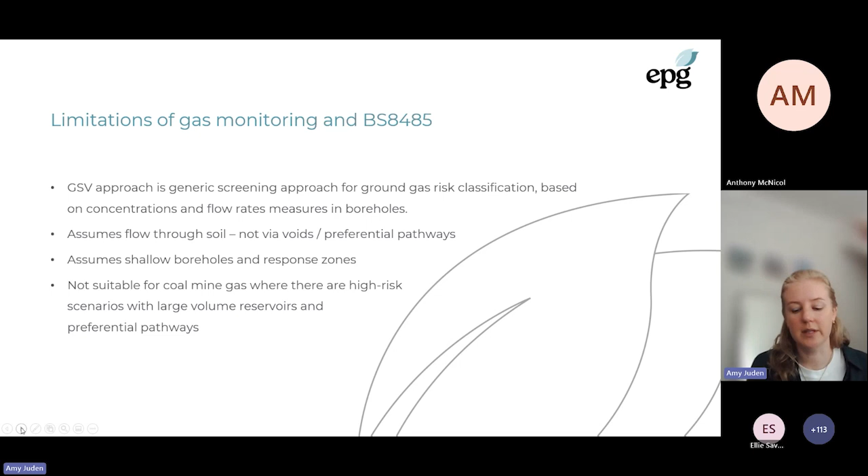So if you need to do this kind of assessment, when and how should you do that? You don't need to do it all of the time. You can do a simple preliminary screening assessment and show that a site is negligible or very low risk.

And if that's a confident assessment, either purely based on the desk-based information or backed up by site investigation, that's a perfect and fine place to start to end even. But if that preliminary assessment is highlighting some moderate or high risk factors, then you might need to consider other things.

But if we're saying when you don't need to do gas flux calculations, so your preliminary assessment is moderate or high risk, but then you've got site investigation data that shows, okay, maybe I might have some moderate or high risk factors. However, groundwater levels are fully saturating the workings and they're there all of the time, and I'm confident in that, and we've got a consistent covering of glacial till.

Or yes, there's a mine shaft nearby, but look, I've had a look at it and I'm confident it's fully grouted, or it will be grouted, or it is vented and maintained. Then, although you've got the high risk factors, you've got sufficient lines of evidence there and confidence to allow you to move back up the risk assessment model and confirm a low risk.

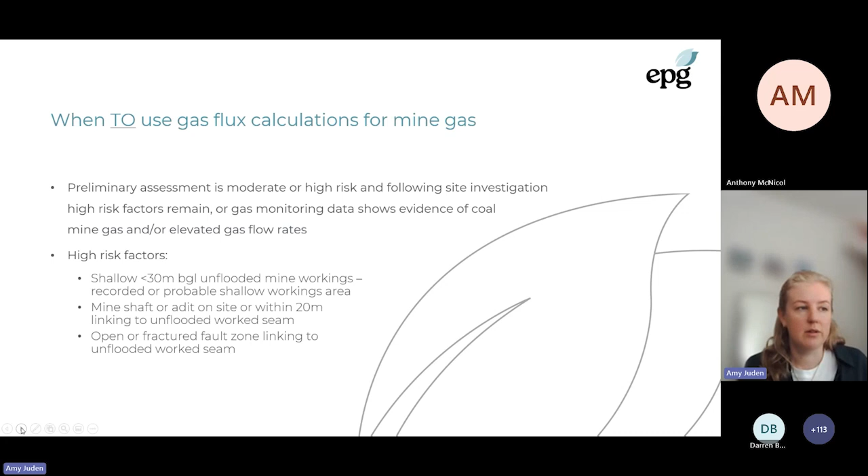So how would we do that? There are different simple one-dimensional steady-state equations that we can use for gas flux, modifying some of the assumptions in the models to make them specific to your site in terms of the migration distance, and the type of soil that the gas has to travel through, or the permeability of the pathway. It's possible to do a kind of calc and a model.

Keep in mind, these are very simplistic, like I said, one-dimensional steady-state equations. Those conditions don't exist in nature. So these models are inherently wrong. So why would we do them then?

They're useful. You can make some conservative assumptions, and you can show, look, even if this unlikely scenario is happening, my design is robust enough to deal with it, and it gives you a level of confidence that your assessment is suitably precautionary.

Definitely need to be done carefully, maybe with a sensitivity analysis on different input parameters, so you capture all of the uncertainty that you've got. And also maybe modelling multiple different scenarios.

Is it gas accumulating in the subsurface very close to the inside of the property and being pulled in by the stack effect of the building through the floor slab? Is that the key pathway that's going to drive the risk?

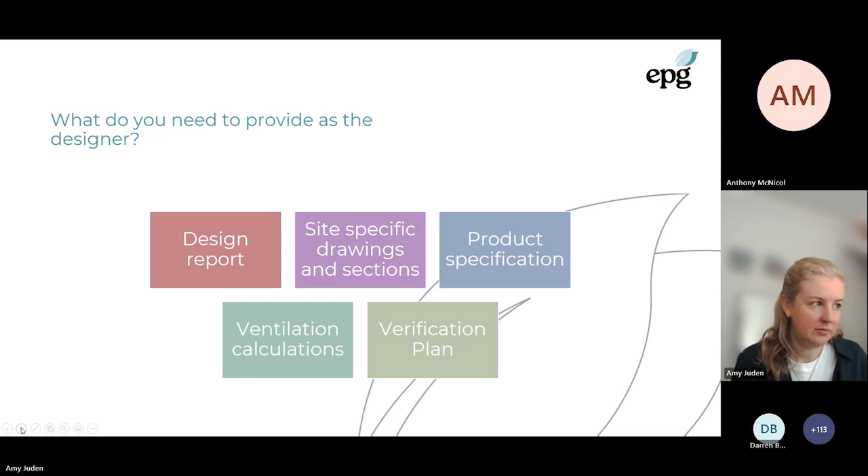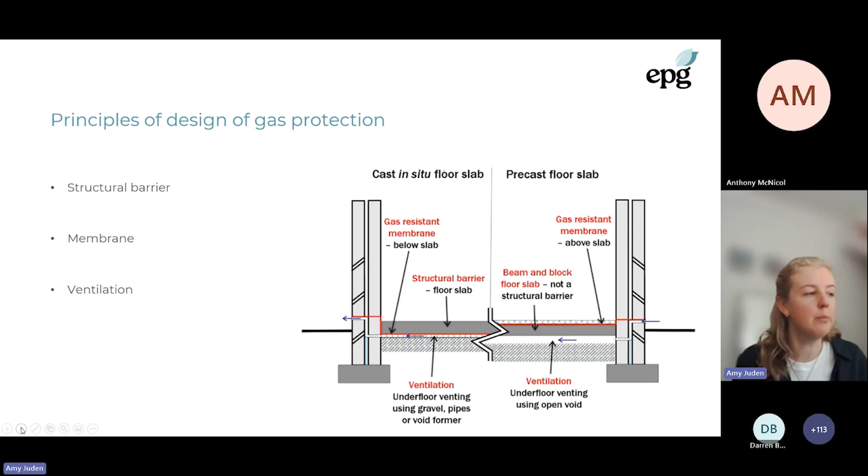Gas protection design is made up of generally three things: a structural barrier, some kind of membrane, and ventilation, a combination of those things, normally two of them, sometimes in high risk scenarios, all three.

And for coal mine gas protection design, the two most common solutions for most sites are a combination of some kind of subslab venting and a membrane over a suspended floor, or a raft foundation that offers really good inherent protection itself and a membrane. Generally with rafts, we put the membrane underneath the raft so it's out of harm's way and not going to get damaged by follow-on trades, but that's a kind of designer-specific assessment.

And seal the utilities ducts, very important. We know this is important because we've measured carbon dioxide coming from mine workings inside people's properties that were built on a raft foundation. And the way it was coming up was through the utilities duct around the water pipe. It's the first place we look when we've got gas inside a home.

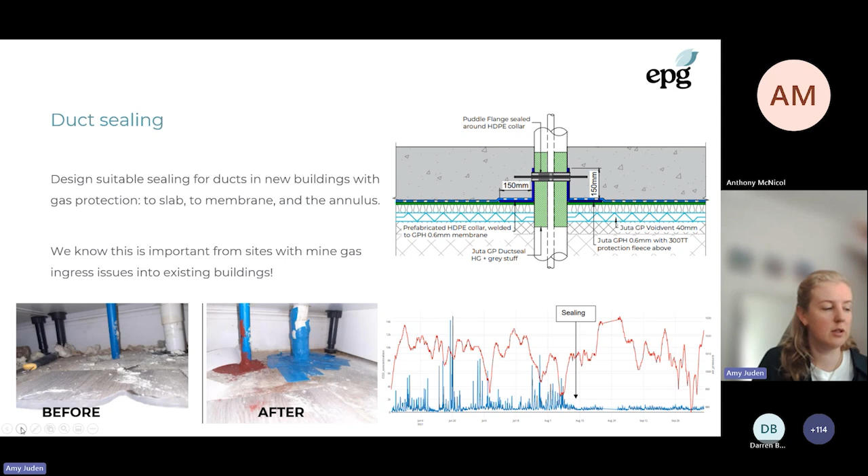And often sealing that up is the way to solve the problem, especially if you've got a raft foundation, which has really good attenuation on its own. So that's a little example - the graph shows it there where we're monitoring carbon dioxide inside a property getting up to quite high levels, and then after sealing the utilities duct, it's gone. So it's really important that's included in designs.

I've mentioned drill and grouting already. It's just some things to consider when we're reviewing drill and grout specs or inputting to them.

One key thing, I've heard mention of sacrificial plastic casings being used for grout holes. I've not measured on top of one and justified this and proven it, but in my head that could create a vertical conduit, increasing the permeability of the shallow ground and allowing gases to migrate. So I would always want to see a drill and grout spec confirm that casings were going to be removed from grout holes and that they would be grouted all the way up to the surface.

We've done a few detailed assessments of the risk of drilling and grouting actually pushing gas onto adjacent properties, and in some situations recommended that the grouting is done at the site boundary and working into the site rather than working across the site and pushing the gas out. And that is often kind of all that's really needed to deal with that potential risk.

So in conclusion, the approach to risk assessment and design is based on the risk profile. If you're negligible or low risk, then you're fine to do a screening assessment. Maybe you'll gather some gas monitoring data just to make that assessment more robust, but it needs to be conceptually low in order for that to be applicable, and obviously all the monitoring results need to be sufficiently low as well.

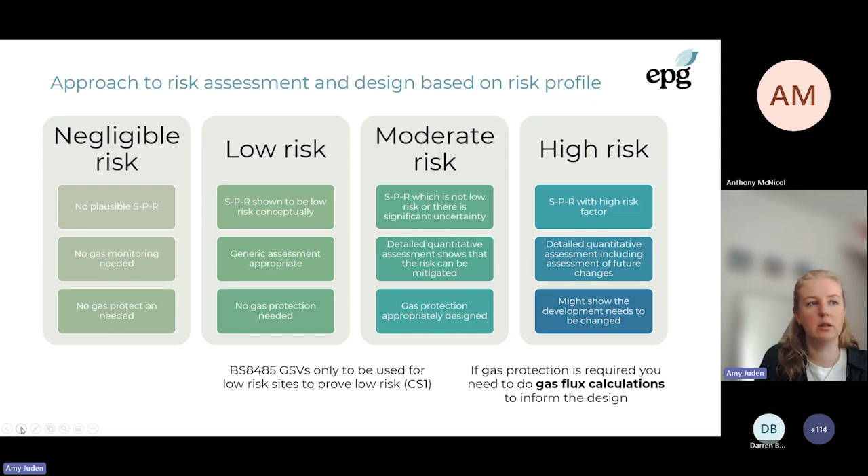If you're getting to moderate to high risk, can you use your site investigation to show that actually the risk is low, if workings are completely flooded or the shaft's appropriately treated, for instance? Or do you need to do some gas flux calculations to inform the design if those high risk factors are still present? And they need to be modelled in a different way than a generic screening approach from borehole data.

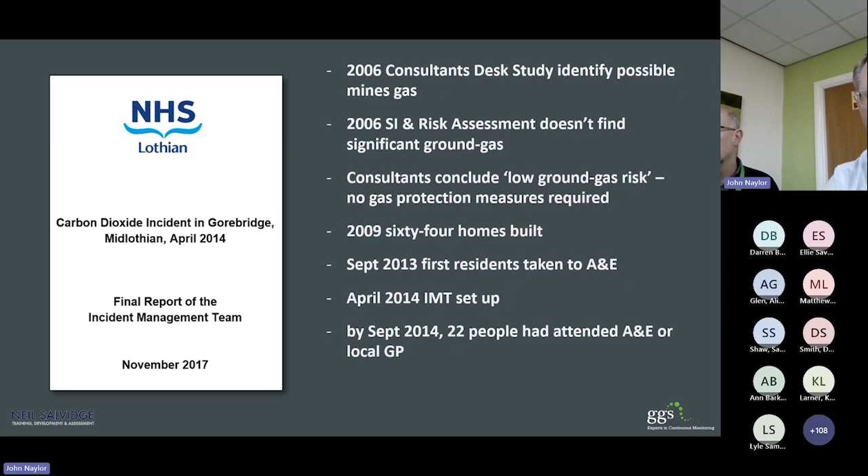2009 comes, 64 homes built. 2013, we had our first residents taken to A&E. So there's a good 4 or 5 year period there between the houses being built, occupation, before we actually had any reported incidents going on. And it was not until April that the IMT was set up, once it was established there was something a bit more going on here. By September 2014, 22 people had attended A&E or the local GP to seek advice or help.

And through further monitoring, elevated CO2, or carbon dioxide, had been confirmed within some of those properties. The decision, rightly or wrongly, was made by Midlothian Council by March 2016 that all those houses were demolished. That was the solution at the time. And of course, don't forget, it's not just the housing that's being demolished, we're displacing families. So, a very critical case study to bring up today.

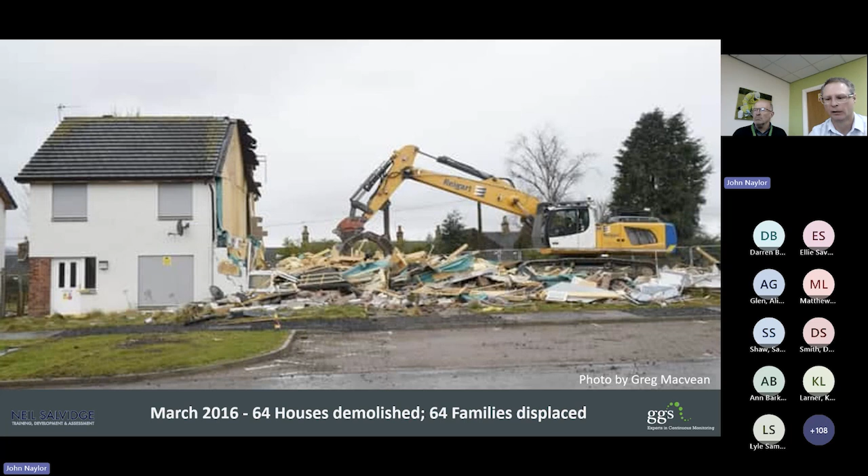So let's run through a little bit of commentary that we've picked up in the IMT. Not all the SI records were actually identified and found. Okay, we've already gone through what the desk study found and what the SI boreholes found. But was there a high risk potential for mines gas? Bear in mind what was said earlier.

The gas monitoring unfortunately hadn't been carried out in opportune periods. Had it been, it probably would have seen a different story. And unfortunately that hasn't been best practice since the 1990s. So again, unfortunately, they're here. CS1 was classified by the consultants, and we've already heard about, that actually using GSVs is the right thing to do on some of these sites, and therefore concluded nothing special required.

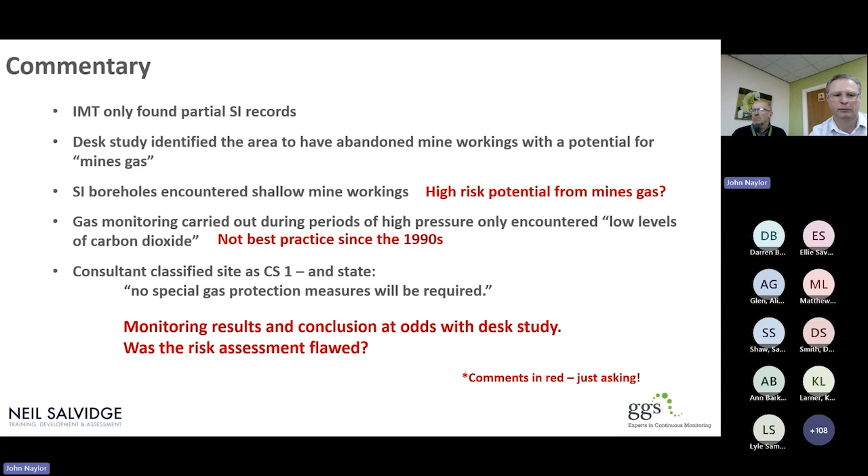For me, the monitoring results that we've found and the conclusions are completely at odds with what we found in our risk assessment. So a bit of a red flag for me there.

Let's look at some of the aerial photography just to see how it developed. So it's back in 1945, just some fields. And we moved to 2003.

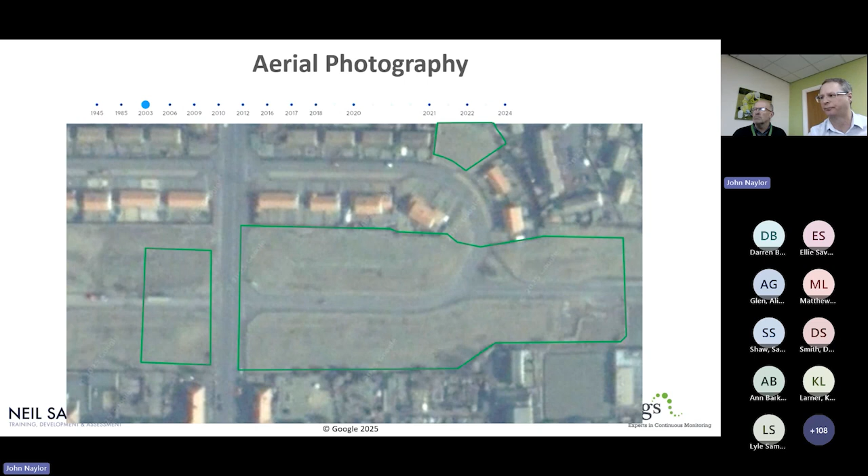Now, what's interesting here is that the strip where the housing was built was all grassed, open space. Don't know why, but that's how it was.

Then 2009, here you can see all the new houses nicely built and occupied. 2012, it's still there. And then by 2016, the evidence is in Google Maps of all that demolition. It's quite a sizable area that they've actually taken out.

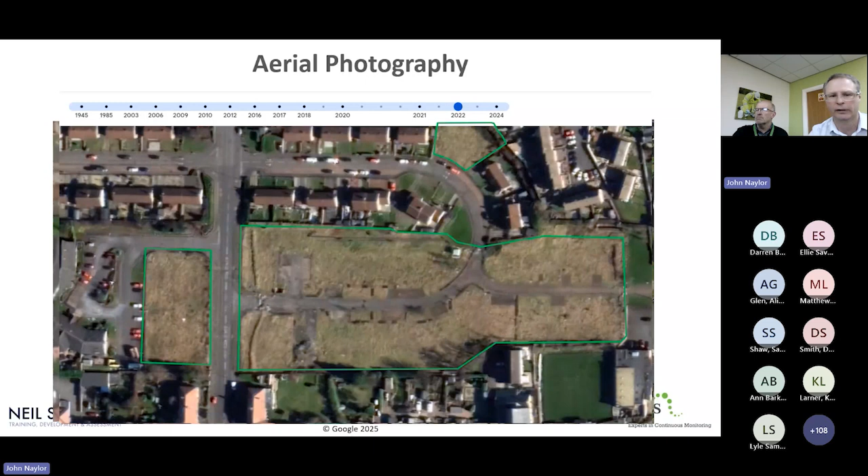That remained the case until relatively recently. It's only since last year that they've now started to redevelop Gorebridge or New Byres Crescent.

So let's take a little look at what might have gone wrong in there. Already mentioned earlier is about grouting, and it's really important. I can't stress how important this needs to be in your risk assessment and plans when it comes to remediating and fixing coal gas affected sites.

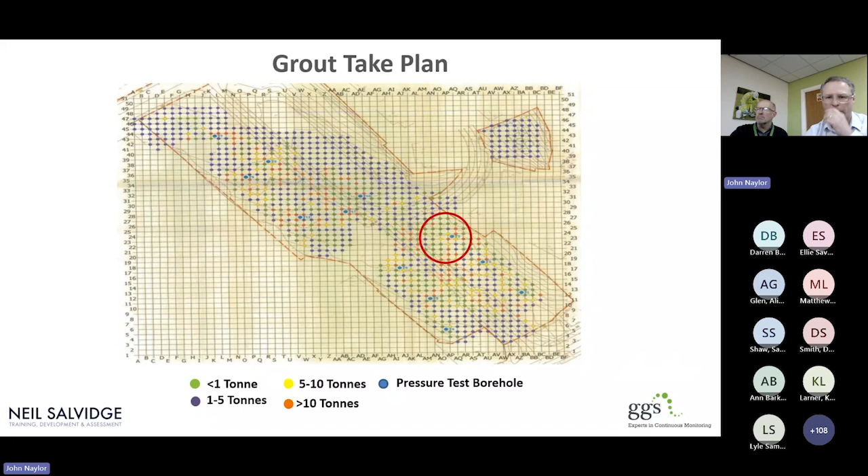Here we've got a grout take plan of what they did, and where that red circle is there is actually where the two houses were first identified with elevated gas. As you can see through the expanded view, there's quite a lot of grout holes in there, but was there enough?

You can look at the takes, they are very different. So from some places less than a ton to others greater than 10 tons. Again, that's usually an indicator of pillar and stall methods of mining, so it's where they've hit a pillar of coal or they haven't.

Should they have gone in and done closer, even at less than 3.5 metre spacings where they've got greater than 10 tons, just to make sure that all that's been filled in.

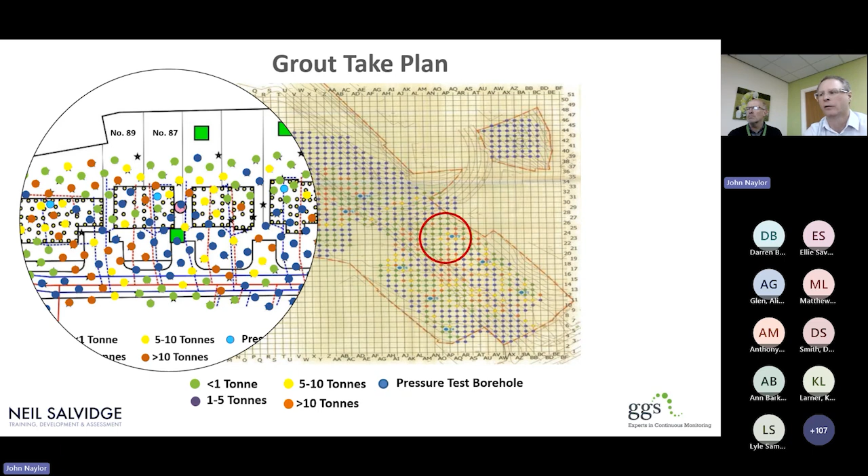Within the IMT, we've got some report conclusions. In there's a conceptual site model in a schematic form. Credits to Fairhurst for that one. It just says everything that we've seen.

The source was confirmed. Workings were found not to be fully grouted. Grout holes possibly not sealed, but obviously the evidence is gone because it's all been built on and covered over. SIs possibly not sealed, boreholes, stone column foundations, possible pathway, and of course, service entries weren't sealed because there was no requirement for gas protection.

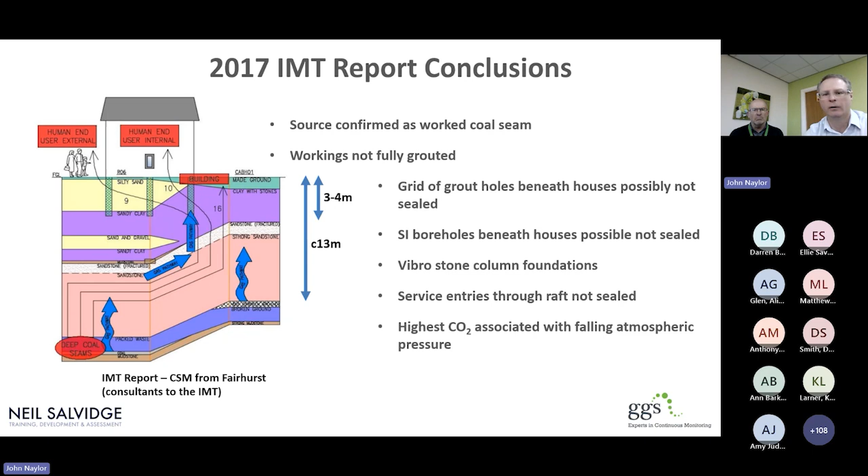And as we saw earlier as well, the highest CO2 was associated with falling atmospheric pressure.

Remember, the idea behind this is for geotechnical purposes. So they just want to make sure the ground doesn't collapse. They're not necessarily thinking about any pathways they're creating to the surface.

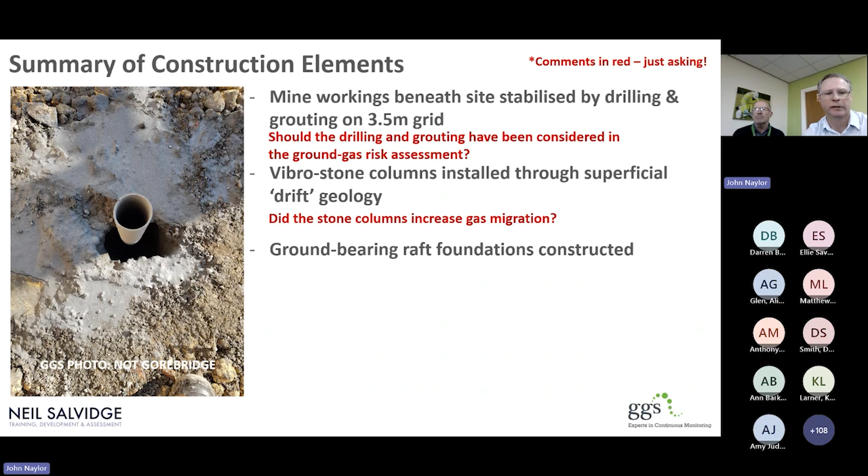So all of this is back to the Gorebridge IMT. Workings beneath the site, could they have done better? Of course, stone columns, could they have increased that problem or gone through the drift that was on site?

They've got a ground bearing raft, not a problem with that, it's fairly common up in Scotland. Should a pressure relief layer have been put in? Could that have helped? We know those weren't, because a decision was taken by whom and when that it wasn't required. So this is the IMT.

My question really is, should this have been entirely preventable?

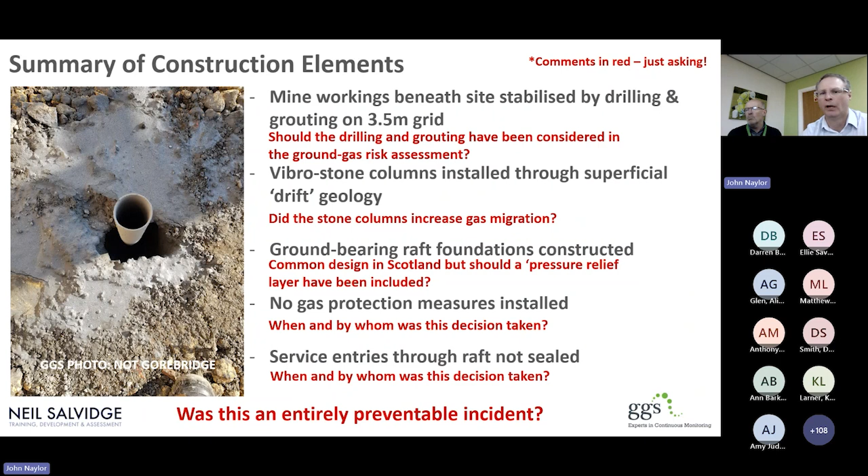Let's have a look now at one of the houses. So we're going to focus on 87 Newbyres, and we're just going to go through some of the concentrations found within the property. This is percent by volume carbon dioxide.

And as you can see, those figures aren't getting any smaller. Quite significant and serious amounts of CO2.

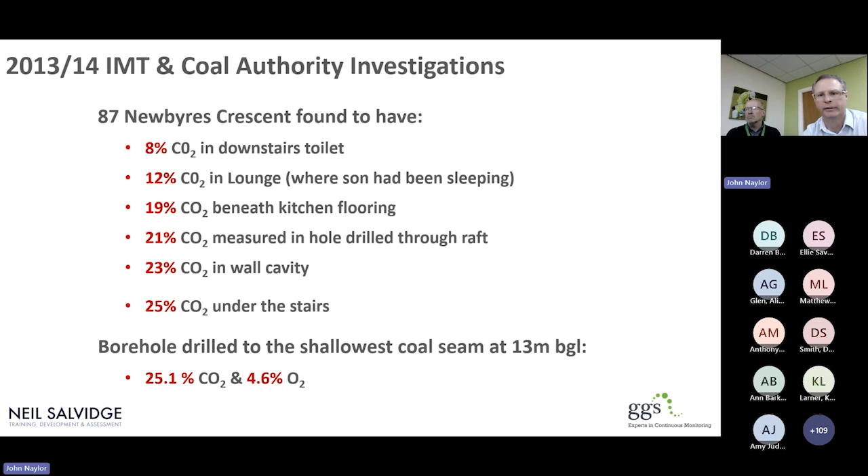And a borehole that was drilled into the seam at 13 meters found pretty much the same kind of concentrations of CO2, straight up through and into those properties. And no grout, funnily enough, was found in the coal seam at that location. So again, it's proving the point.

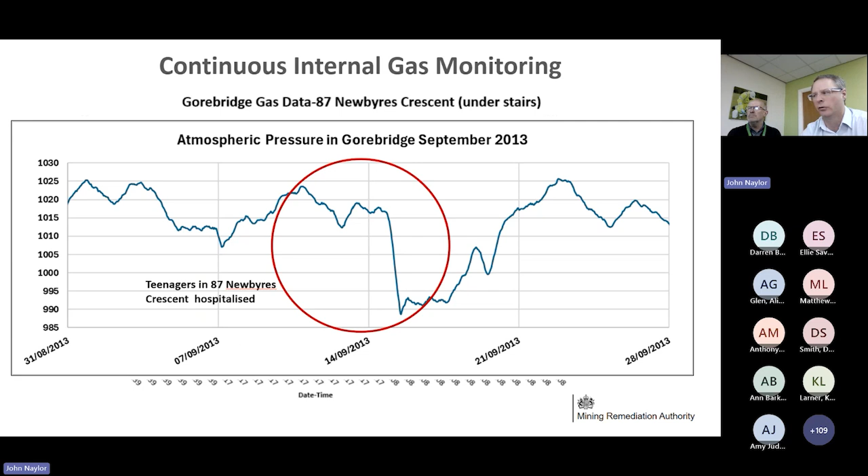Some continuous internal gas monitoring was done at that location by the Coal Authority, now the Mining Remediation Authority. As you can see, they've used red for carbon dioxide, and that's peaking at 25% on a number of occasions. For those eagle-eyed and monitoring, you'll notice that it's when atmospheric pressure falls that the actual A&E cases start to happen, as a result of quite a massive pressure drop during that day. So there's the evidence, and that's what's happened.

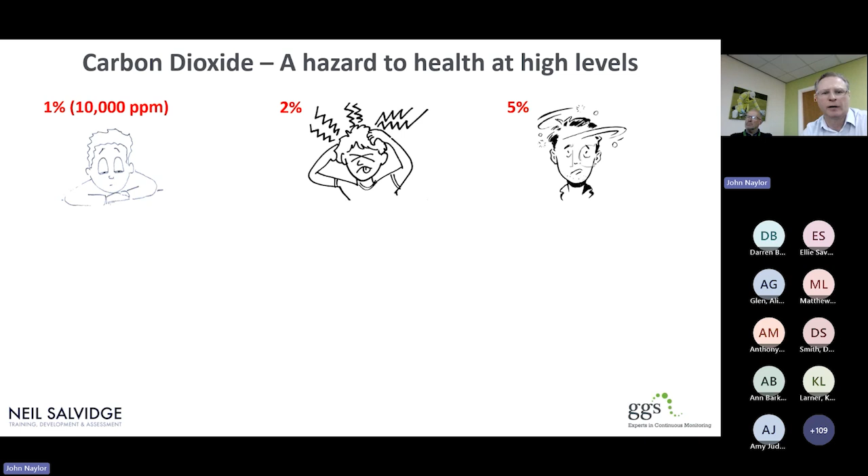But let's have a quick look at carbon dioxide and its health levels, just to give you an idea of what we're worried about. At 1% you might be feeling tired, 2% headaches, 5% dizzy, all this kind of stuff. At 8%, it's not looking good. At 10%, vomiting, and then at 25%, you won't be walking around if you're exposed to that for too long.

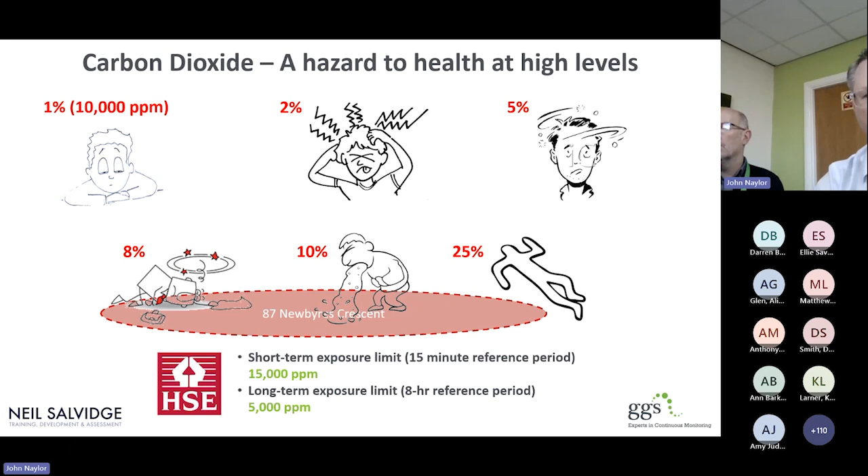The HSE occupational exposure levels have been set for workplaces, not residential settings, as short-term and long-term exposure limits. When we look at the results from Gorebridge for that property, you'll see that we're way over where we should be, and it's quite dangerous.

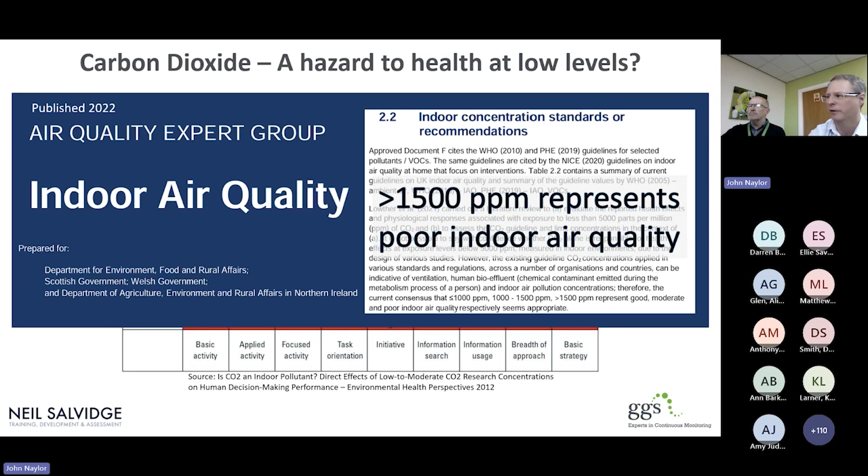In 2022, the DEFRA Air Quality Expert Group came up with some recommendations, essentially saying anything more than 1,500 ppm represents poor indoor air quality - though it didn't go as far as saying it was a health effect. A year earlier, the IAQM said that over 1,000 ppm you really need to be thinking about it. So there's some food for thought there when it comes to regulation and what levels might be looked at when it comes to doing something about it.

So that's Gorebridge. And now quickly over to Neil.

Thanks, John. That's interesting seeing those findings. When I spoke to John about presenting this today, we thought we'd bring in some of the elements. Those that have met me previously on ground gas training, we talk about verification and how much difference it would make if verification existed today for Gorebridge. So I used some of the slides I've previously used, but also the CIRIA 735 decision structure, professional judgment, looking at all the site investigation that Amy and John have both gone through. Should the verifiers be factoring this into their verification reports and their working?

As I witness a lot of verifiers on site, if I was to mention this to them - well, it's been done, that's finished - I'm sometimes a little concerned about how much verification actually takes place of the site summary. Assuming a CS1 situation, should they just rest on their laurels at this point and say that's verified, move on? Or should there be more robust verification happening to justify what's been done in the remediation, especially the grouting that I picked up on there, John? Do verifiers come and check the grouting?

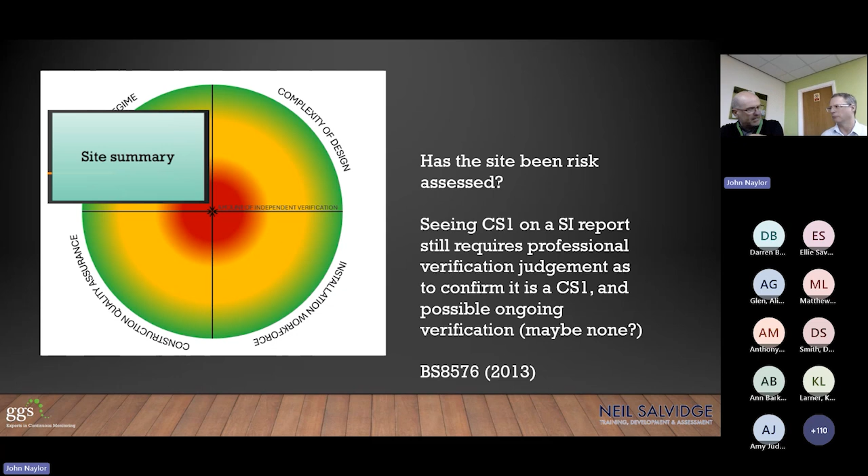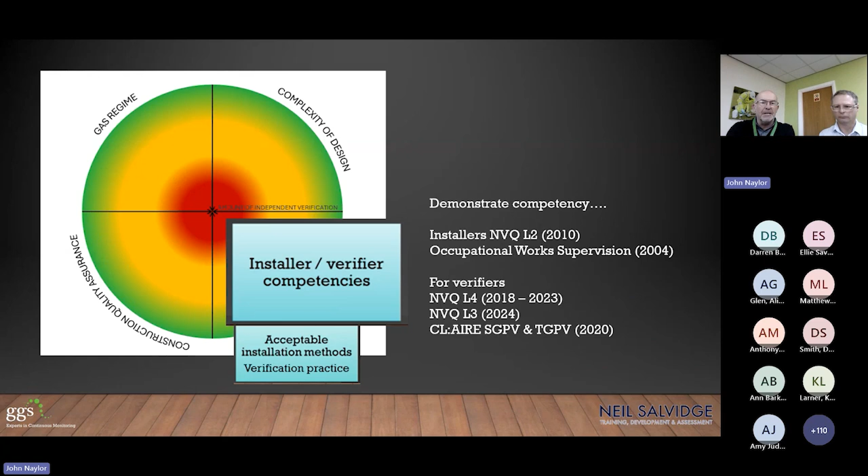We have got the NVQs for our installers, which came out in 2010. We have other qualifications, the NVQs for verifiers, and also the CL:AIRE SGPVs and TGPVs. Again, these weren't in existence at the time of Gorebridge, so not particularly any use at that point - it was being drafted in 2014. But having acceptable methods of both installation and verification practices should be demonstrated in the verification planning of what's going to be done. So just thought we'd include that there. Again, design - Amy touched on a little bit about design.

735 talks about the designer being competent, understanding the different elements and what tools they've got in their bag to use, what guidance. Now, British Standard 8485, whether appropriate or not to the gas screening values highlighted here, but in 2007 was its first issue of 8485. So there were things out there telling them about design of gas protection systems.

Other documents exist, some of them may be relevant, especially though we've got 748, which is the VOC barrier, not particularly relevant in this case, but verifiers should have understanding of all these codes of practice to use them. And the other one we highlight is qualified experience and being suitably trained to do this.

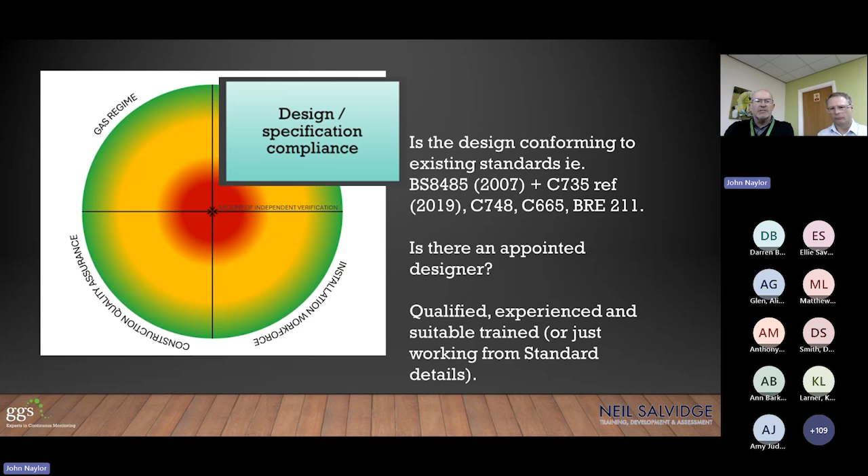We meet a lot of people now that say they're designers, but they're just working off standard details. Cut and paste, that'd do. I'm sure the manufacturers or the supplier of those standard details do not take the consequence and the professional indemnity for providing them as the final detail. So that's something I'm always wary of when I'm questioning verifiers.

So defining those contents of the final verification report, be mindful here. Is it going to contain good outcomes, or is it going to contain bad outcomes?

Now, John's chuckling at me. Have you ever sent a report in with bad outcomes, John? Oh, yes. So don't just assume that the report's going to land and it's all going to be singing and dancing and signing the job off. There could be some bad news in there that people along the line have not picked up on, or it's not been actioned. Work moves on apace on these construction sites, so being mindful of that.

We also use, and I use this a lot in my assessment practice, VAR. So it's nothing to do with the professional championship, Premier League football. It's valid, authentic and reliable evidence. If we are going to produce it, certainly if we're going to rely on CQA from the installers or third parties that are involved, is that going to be valid, authentic and reliable?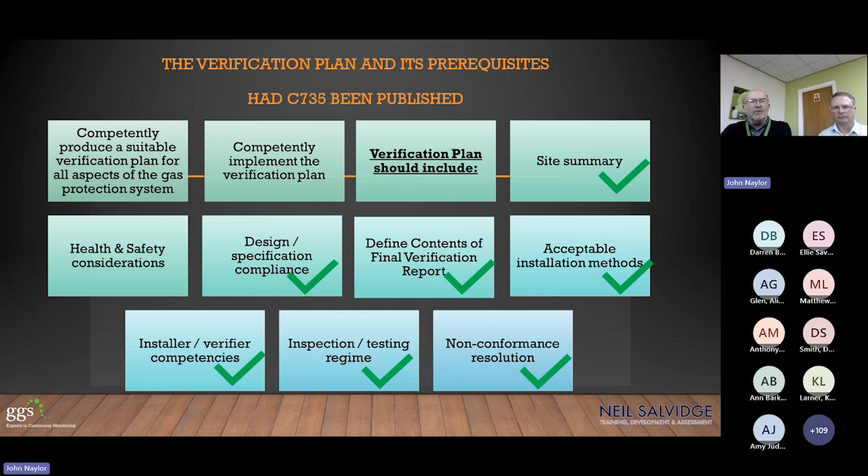Going back to our prerequisites, we've done a lot of work there, and hopefully these are going to be kind of checkpoints that we'll see. But there's a slight fly in the ointment that came around in 2022, and I'm going to bring it in now where we talk about the Building Safety Act. It's been a massive game changer.

It's going to put a lot more onus on competencies of everybody. There's nobody exempt from this, wherever you sit in the framework. And I hopefully will highlight that in the next slide when we talk about the key stakeholders involved in what we do, and the golden thread.

Now, if you've not heard of the golden thread, it's very worthwhile looking into it, because it's where all these stakeholders have a duty, and even the regulators sitting there at the kind of figurehead positions, pressing the buttons yes or no. But that golden thread is going to loop, change, turn around. And we know this has come around off the back of the unfortunate events in Grenfell Tower. So hence, keeping accountable trails of who's made decisions, what's been done, verification - it's all very important.

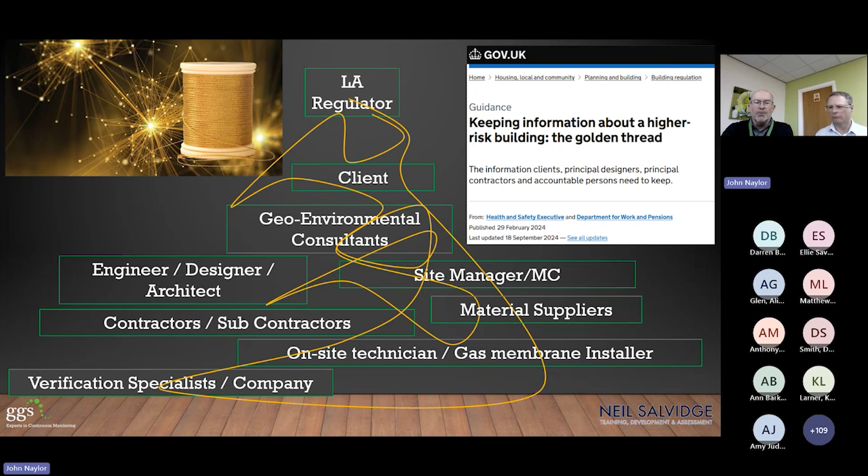So just to wrap up, would Gorebridge happen today? Well, there's lots of things - hopefully better site investigation, more thorough records. I think, you know, what was done at Gorebridge - hindsight is a marvellous science. Sure, good design, appropriate site investigation to build that design, appropriate people.

I've listed there again, build and design. Cost always plays out - if somebody can do it a bit cheaper, are they cutting corners or are they doing it for the good of the project? Compromises are often made there.

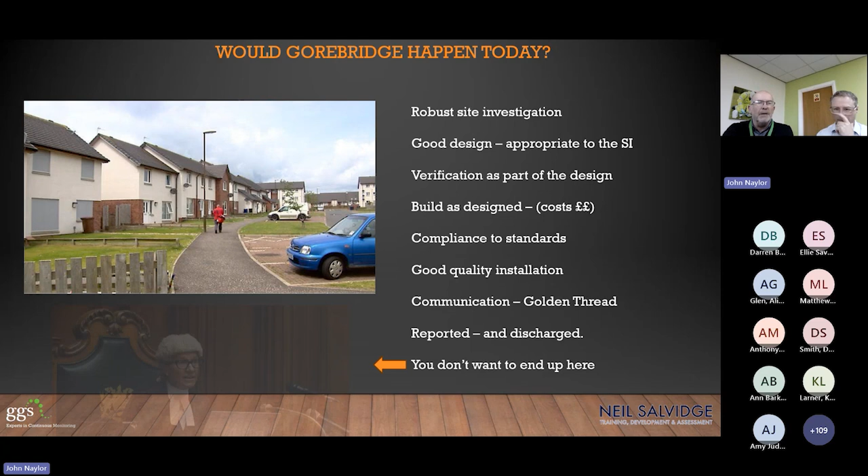Compliance to standards, hopefully quality workmanship - I've been badgering on about this for about 15, 20 years now, and it's improving. That final reporting, evidence of this, good verification, it's really important, and hopefully it's going to get better and better, because you don't want to end up with someone in a curly wig asking some very awkward questions. That is what the Building Safety Act is going to drive us to, and we've seen the first litigation going through using the Building Safety Act - not in the ground gas sector, but it's only a matter of time.

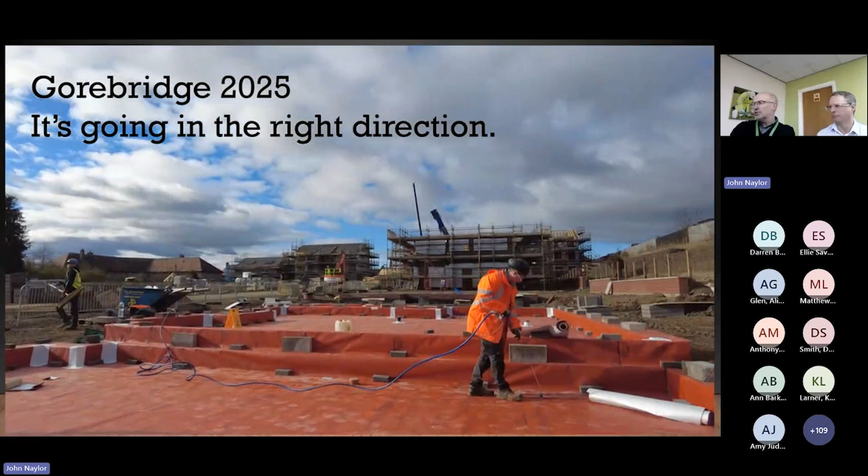So I just thought I'd finish off with a nice little clip of Gorebridge and some work going on there - this is Gorebridge today. We're just going to play you a little clip so we can see the gas protection being installed in Gorebridge and some verification happening. This was pretty much where you targeted the grouting, John, in that location. So that is Gorebridge today, and it's moving in the right direction.

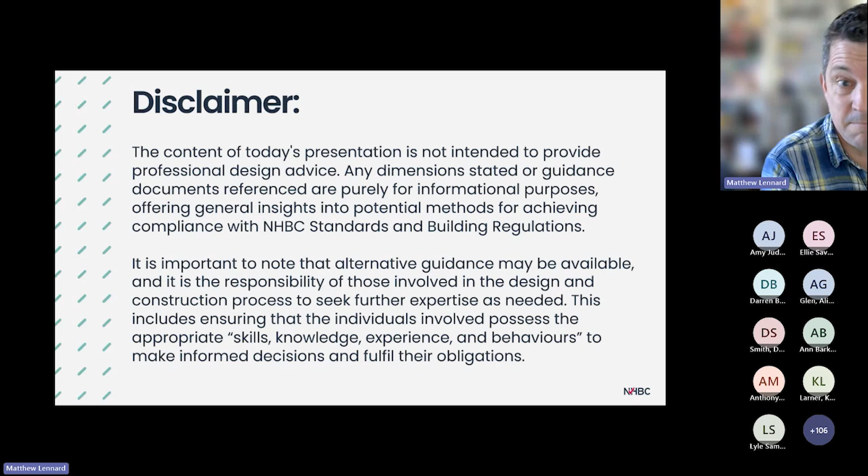So firstly, apologies - our corporate people have said we've got to have this disclaimer, I'll let you all read that. But to be honest, there aren't any dimensions or details in my presentation, so hopefully it's all taken as read. This is not design advice.

My aim today is to run through NHBC's requirements for ground gas risk assessment, design and verification and protection measures, and what we do see versus what we'd actually like to see. I'd say it's actually a good thing I'm not talking about coal mining gas risk assessment, because Amy, John and Neil have already covered everything I'd want to say.

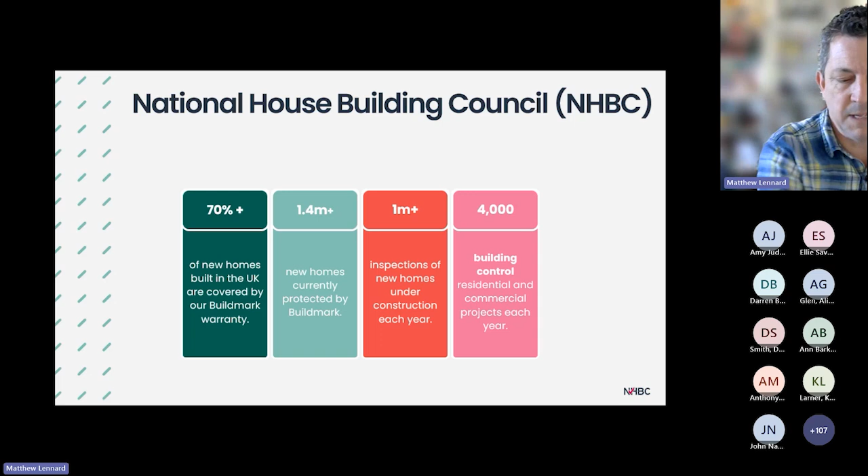NHBC, the National House Building Council for those who don't know, currently provides warranty for between 70 and 80% of new build houses, so that's quite a bit. Currently we see on average, I think it's about 1 in 8 sites ends up having gas protection measures installed, which seems quite high to me.

For when we provide warranty for new builds, all homes registered must comply with our standards. As linked to standards, for land quality and other aspects of the build, we set mandatory conditions to make sure we're happy the site is being properly assessed, where issues have been found, where gas protection measures are required, and that the measures are designed and installed correctly. Ultimately, if the mandatory conditions remain, the builder can't get a warranty, and with no warranty, there's ultimately no sale. So we're all pushing to get to that end point where everything's good to go.

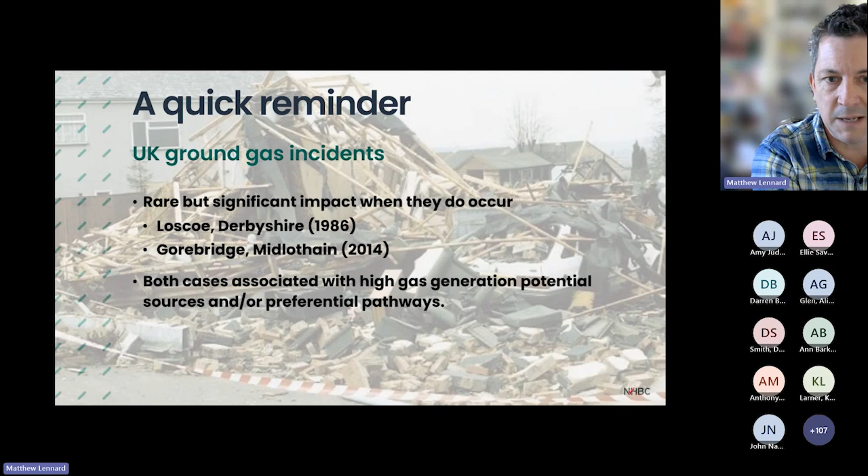Quick reminder - I've spoken about Gorebridge already this morning. Loscoe was the other site. So ground gas incidents, serious ones in the UK, are rare, but they do happen, often on sites with high gas generation potential. In Loscoe, clearly it was landfill gas with some nice pathways, and Gorebridge, already discussed, was associated with coal mining.

NF94 was published back in 2023, nearly 2 years ago now. Great work from Amy and the guys at EPG and 1 or 2 others, including Neil as well. That can be downloaded for free from our foundation. And just as a quick headline, the old traffic lights guidance from 2007 is being withdrawn, and as of the 1st of July this year, we will no longer be supporting it or accepting risk assessments based on it.

So what's the purpose for NF94? We see a lot of poor quality gas risk assessments, often very precautionary, often over precautionary, which is not to say we don't want things to be precautionary, but they can just take things to the nth degree. We're seeing more and more complicated builds with modern methods of construction and timber frames, and that's creating difficulty.

And ultimately, because we're an insurance company, from a claims point of view, we get moisture ingress issues just along the horizontal, where a membrane's been installed horizontally across the cavity. It can act as a pathway. The membrane's doing a great job protecting from gas, but it creates a nice horizontal pathway for moisture to get into the building, and that causes us claims. Obviously, as an insurance company, we clearly want to avoid that.

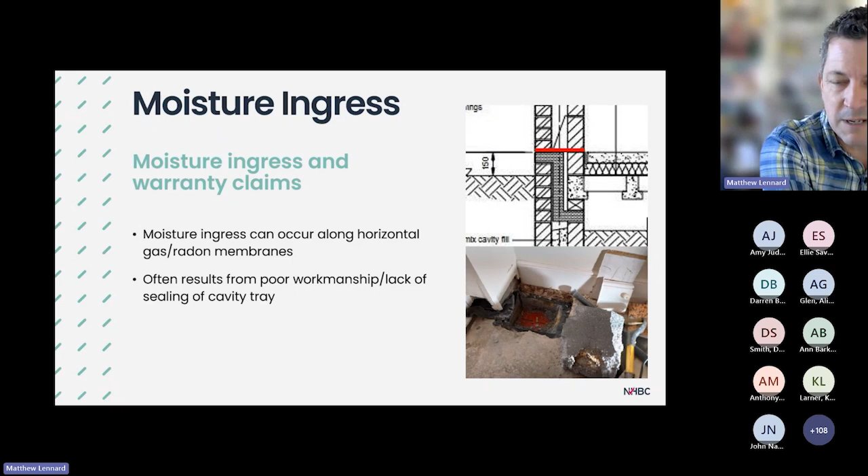The moisture ingress issue is often from poor workmanship, a lack of sealing in the cavity tray, or poor installation of the cavity tray is normally the root cause of that. But I think we see the biggest amount of claims at the NHBC from moisture ingress, and horizontal membranes are a problem for us.

So anyway, back onto your gas risk assessment, we see a lot of precautionary stuff. This is a photo I took the other week on my dog walk. It's a field - it used to have sugar beet in it, but now it's been ploughed up. But there's a bit of made ground there. You see where I was standing, it was on a track. So there's some stuff there. But is there really a gas risk assessment needed, or could that site be screened out early on in the desk study stage?

So at preliminary risk assessment, what do we see? Well, we want to see an initial concept site model. We want plausible gas contamination linkages - are they present? Are the gas sources credible? What about the age, the size? How much gas is going to be generated? And again, are those migration pathways really plausible?

Are they really there? Is there an offsite pond that was filled in 1900? Is there any gas coming from that? Is it really going to migrate 200 metres horizontally and pop into someone's house? So again, it's no different to doing coal risk assessments.

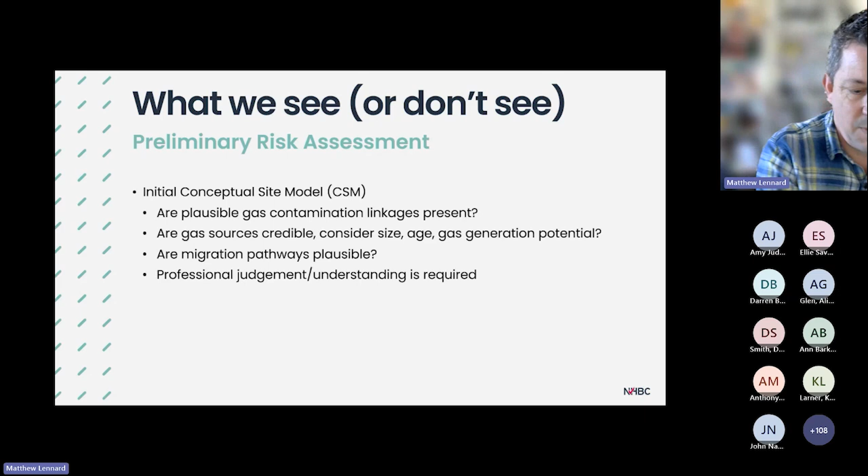And what we very rarely see are cross-sectional CSMs to scale - what's the geology, what's the topography, what's the depth? Just as Amy said earlier about, especially on coal mining, it's so important that there was an understanding of that when you developed your risk assessment model.

And development plans - it's great in the SI when it's a field, but what's it going to look like when it's being built and the houses are there, or whatever buildings you're building? What are the final levels? Is that things being raised? All that needs to be taken into account.

So this is what we often see in a typical gas risk assessment or conceptual site model. We see elevated CO2 from a landfill, migration through soils, and we get the consequences. And if you read the guidance, consequences we know from Gorebridge and Loscoe can be severe. So it depends on how low your probability is. If you follow that guidance in this old CIRIA document, you'll end up with a moderate risk, which says you must do something basically. So that table's all taken from your site desk study, your site history, your historic maps, everything else - it's just been diluted, condensed down to one line.

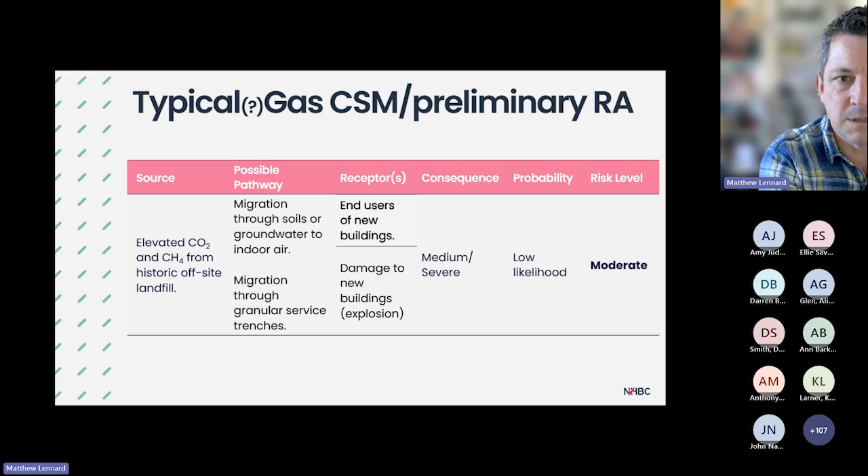But what happens if you do a cross section? So here's the geology, this is the site - the same site as that risk assessment. Historically it was a clay mudstone. They built brickworks in the 1950s, and then there was a big council tip in the 1960s to 80s. Then sometime in 1987, they built a supermarket on top of it.

This kind of tied in with Loscoe, and then at some stage, not too long after that, they put in some gas management system. And if you go to that site now, the supermarket's still there.

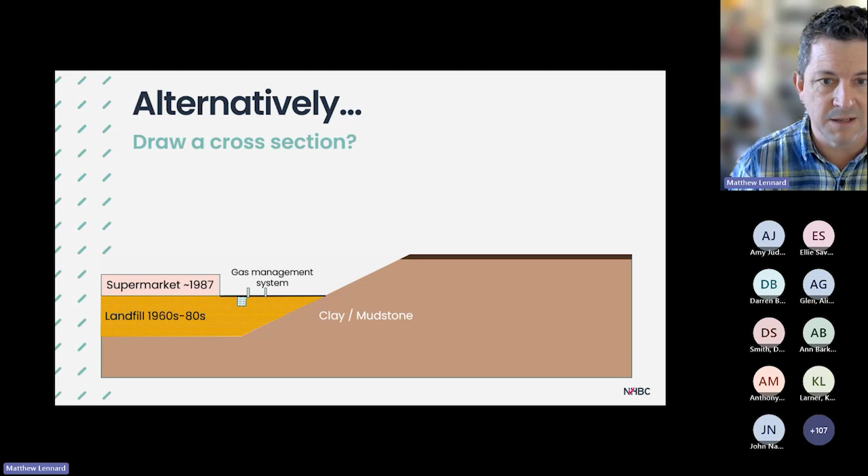You can see the vents and the cowls in the car park.

Then in 2020, the neighbouring site, 100 metres away at the nearest point, started building a new housing development. It's a massive site with probably about 1,000 houses. Based on the original data table, they put in some gas boreholes on site and found low levels of carbon dioxide, about 6-7%. So every single house on that site has now got gas protection going in. Maybe it's needed, but obviously the risk driver for that was the landfill, not the clean cover.

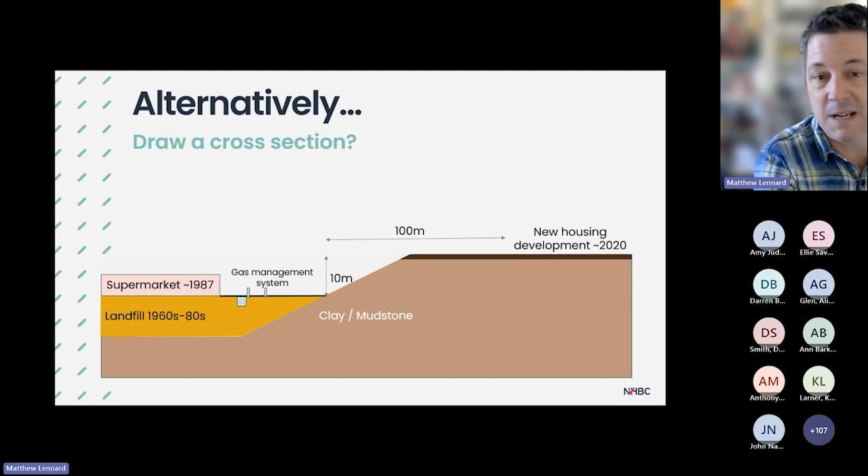So the question should be asking: is there really a plausible risk? How's that gas going to get from the landfill across to the housing through that clay and mudstone? So maybe a more appropriate method of investigation would be to investigate the potential pathways between the two.

So what do we see? On-site investigation design should be based on the CSM, and always, if you're out on site, have that conceptual site model in the back of your mind when you're doing the work. Are the soil gas sources that you thought were there at the desk study stage still plausible? Is gas monitoring actually still required? And do the monitoring wells you're putting in target the gas sources?

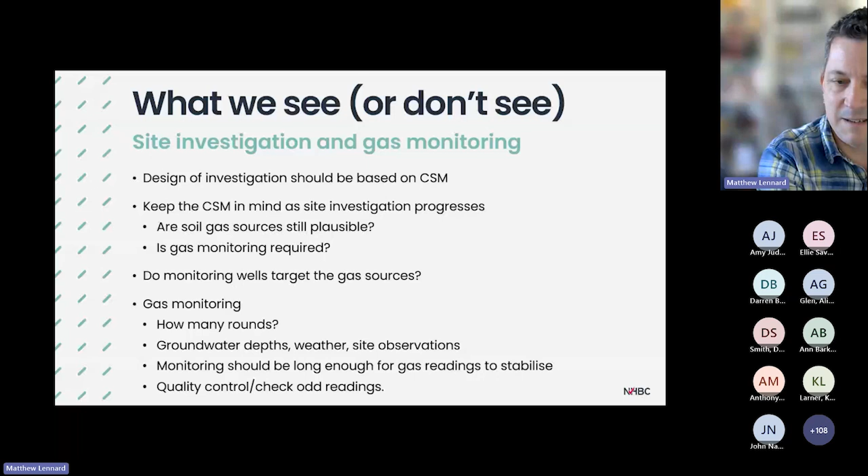We see so many sites where there's 0.5 metre of made ground and there's a monitoring well installed with a response zone below that. Again, the questions to be asked: how many rounds do you need? What are the groundwater depths? And obviously we need to see monitoring taken over a time long enough for the gas to stabilise and get realistic readings.

So here's another site. This is the Greenfield site. There was a railway, so can you spot the gas sources? There's a little pond there, not infilled. This railway has been present since the 1800s.

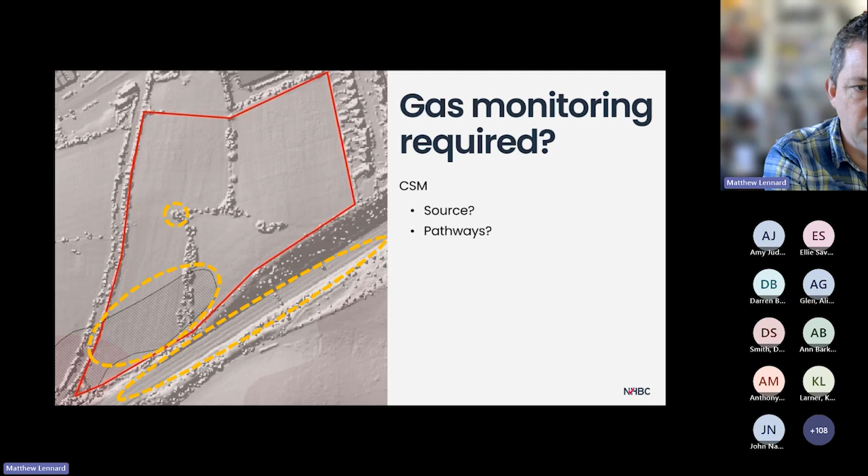The consultant suggested that the made ground used in its construction might be a gas risk, and on the BGS maps there was some possible made ground marked. So clearly there was some stuff there to be looked at, mainly the made ground. The consultants did some work, but they found only clay soils - there's no made ground anywhere, and the geology of the site is pretty much London clay.

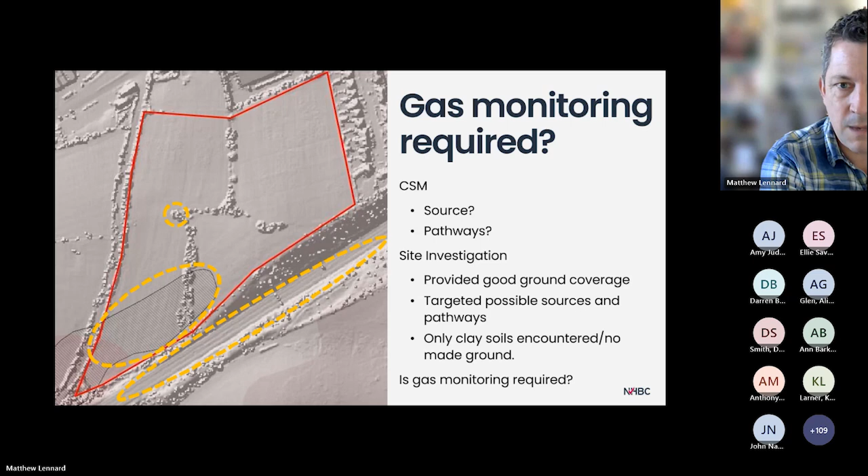But they still cracked on, despite the fact there was no evidence of any gas sources, with low permeability pathways limited to low permeability soils. They cracked on and did 6 rounds of gas monitoring, which was kind of pointless really, because there wasn't a source or plausible pathway. Fortunately on that site they didn't actually find anything, and it was confirmed as CS1.

And monitoring well design - always important. This is another genuine site I was looking at back in the autumn. A little bit of made ground. This is out in East Anglia on tidal flat deposits, low lying on the fens. This is where there was an infilled pond, and this is where they installed all the wells. They even got an infilled ditch. So all the wells were installed in the natural soils, and all wells were flooded.

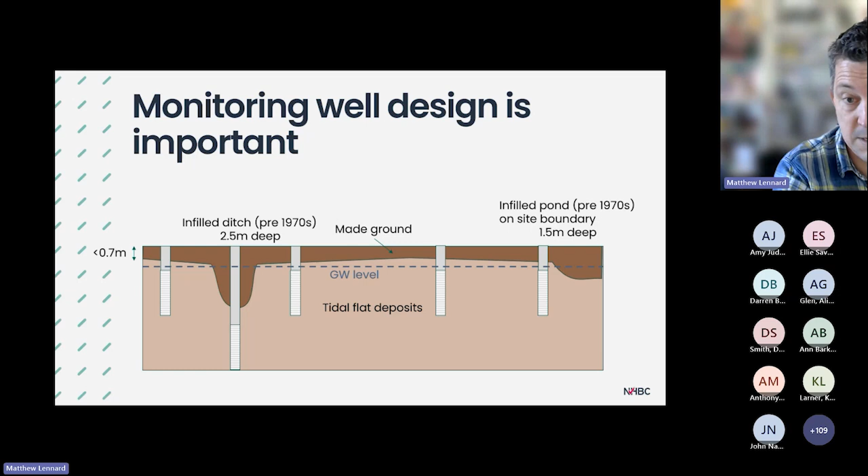And the results from that, due to the piston effect in the boreholes, they found some elevated flows and some elevated methane, and we ended up with a CS3 site, when in reality, with a better risk assessment, it probably would have been CS1.

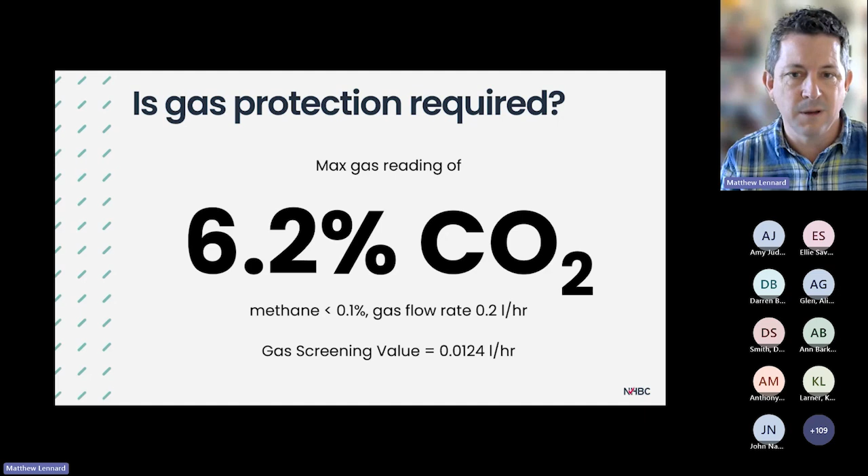So we see the risk assessment focus is just on data and GSVs. It's not about the conceptual understanding of the site. We still see use of data flooded wells.

We don't see much of what we'd call referring back to the CSM, finding multiple lines of evidence, not just gas data, but all the geology and everything else collected as part of the conceptual site model.

And consideration of high-risk sites. VOCs - I see a lot of sites where the principal risk driver seems to be the fact they've got 6.2% CO2 in the ground, not the fact they've got vinyl chloride in the groundwater. And the proposals are just standard protection measures, sticking in a VOC membrane.

And obviously coal mining is another high-risk site. The problem is when there's all this focus on low-risk sites, when you see a high-risk site, it just doesn't get the attention it deserves.

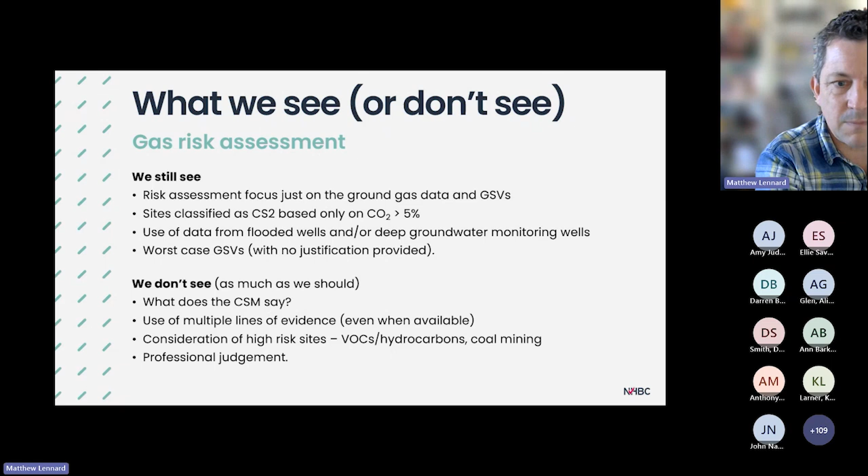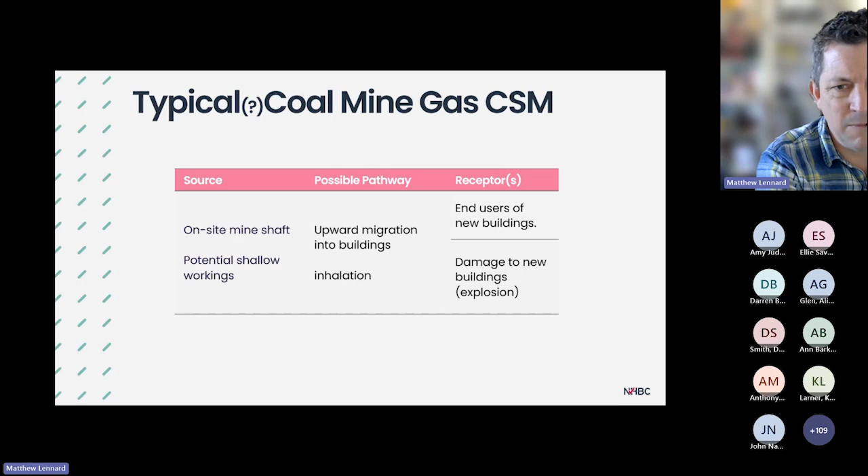But this is what we normally get. We'd love to get some of those nice cross sections that Amy had in her presentation, but we often just get a one-liner source-pathway-receptor, not really - it's just cut and pastable from a previous report.

So my observations from what we've seen so far: we ask for coal mine gas risk assessments at NHBC when there's concerns, but there seems to be very little awareness amongst consultants working in coal mining areas.

We often see far more likelihood of gas monitoring due to an off-site infill pond than for shallow coal workings. And again, some focus is still, most of the time, on the gas risk assessment from BS 8485.

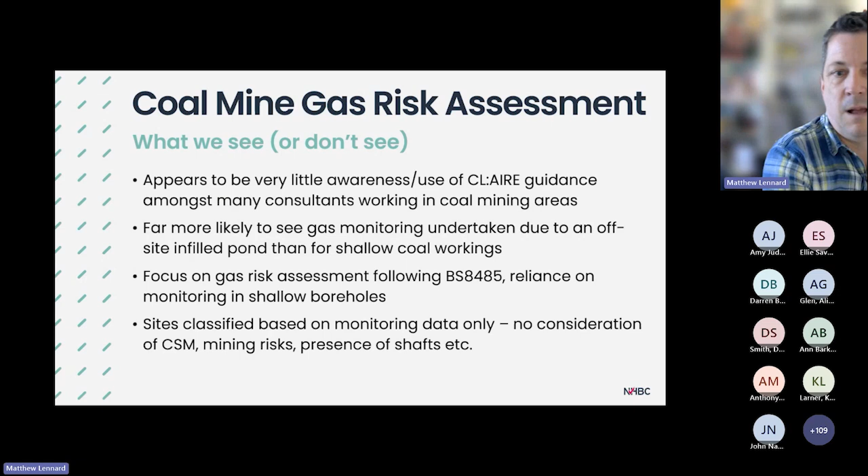That reliance on monitoring - six rounds of monitoring in shallow boreholes - and no consideration of the conceptual site model, the mining risks, and the presence of shafts.

So anyway, that's where we are with risk assessments. We see a lot of over-precautionary stuff, but it does tend to mean that when you get the high-risk sites, they often get ignored and don't get the attention they deserve.

When we get a submission for gas protection design, we get a standard detail. Ultimately the question is, on these sites, who is the designer? The standard detail is fine, and if you build that correctly, it's absolutely fine.

But what happens on site? And it's not just the membrane; it's the ventilation, the air brick locations, and what about the final finish? The big problem we see is what happens outside, on the rest of the site - how do these designs tie in with the other designs?

And as Neil mentioned about the building safety regs, there's legal requirements on designers now. One of the requirements is that designers should consider the implications of their designs on other aspects of the build.

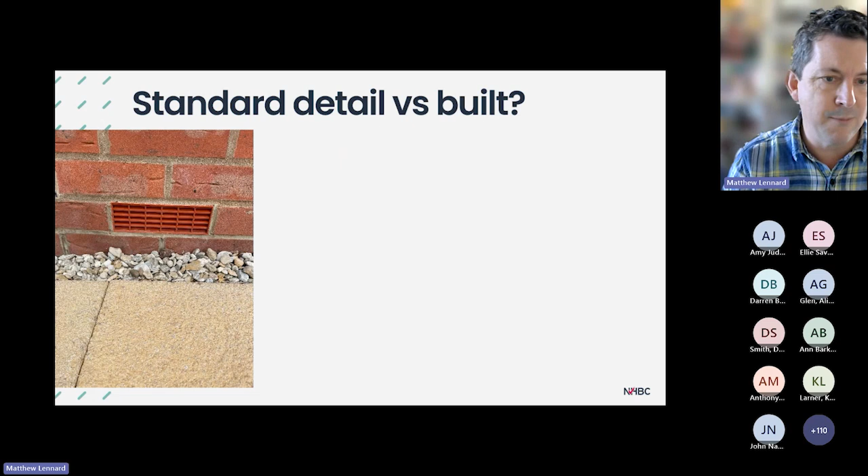So this is what we see, and this is what we'd like to see: a standard detail, nicely installed air brick. But what we often see is air bricks below ground level, which clearly doesn't comply with the drawings - the standard drawing detail says 150 mil above ground level.

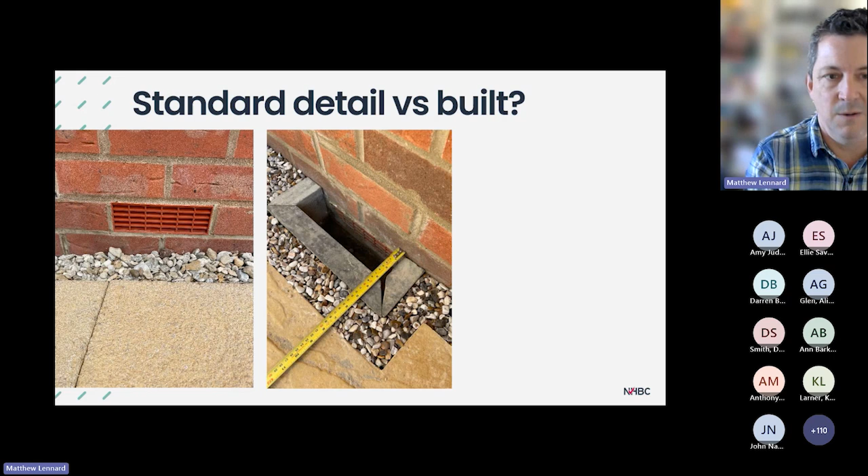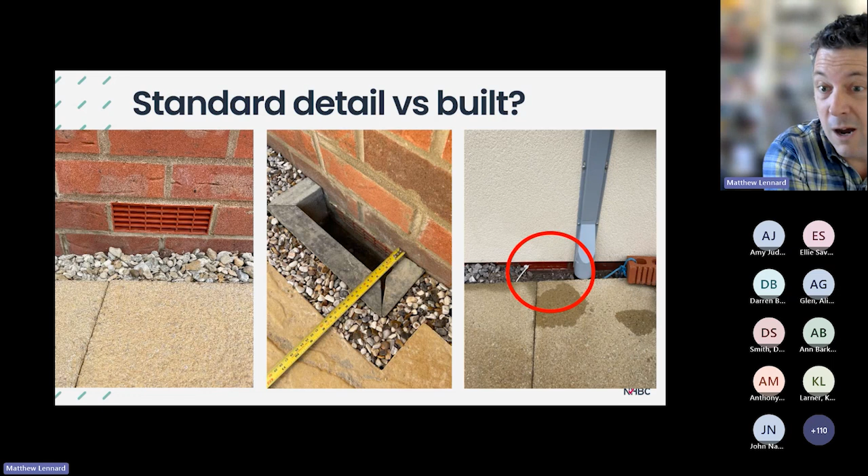And this second one was again another air brick - they scraped away the gravel fill so you can see it, but that's not going to do the job. It's not as it was designed to be. It's going to get clogged, and ultimately on a high-risk site when ventilation is important, that could be a massive issue. So what do we see?

So what we want to see, and what we rarely see, is a detailed design report for the gas protection measures. That's it, not just standard details. This is recommended in BS 8485, so it's not a new thing. There's a lot of detail about it in NF94, and it should be site-specific, including all the key assumptions and justifications. And when we talk about site-specific, we mean all the aspects of it.

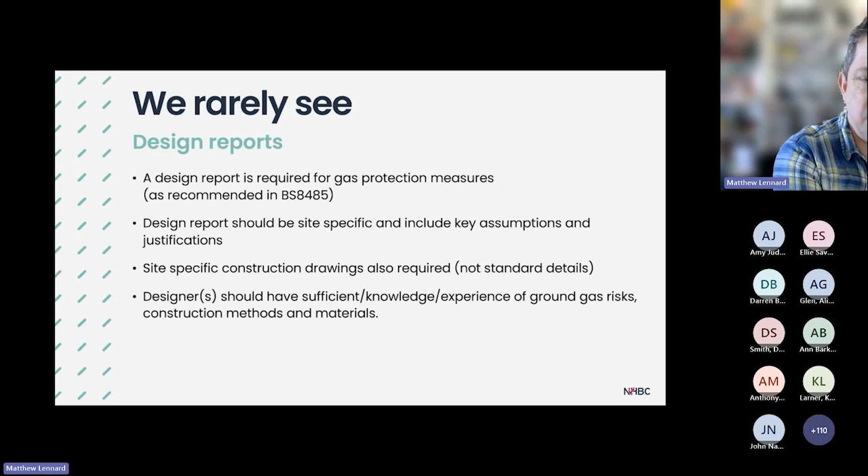Again, how are the final levels going to impact on those designs? That gas protection measure is still going to work. And ultimately, the designers, as Neil has already said, should have sufficient knowledge and experience of ground gas risks and construction methods and materials. On the specification of materials, again, this should be designed - the various elements and materials should be specified by the gas protection designer. It is not up to the architect, the structural engineer, nor the installers or the material suppliers. It should be the person designing it, and this should all be included in the design report.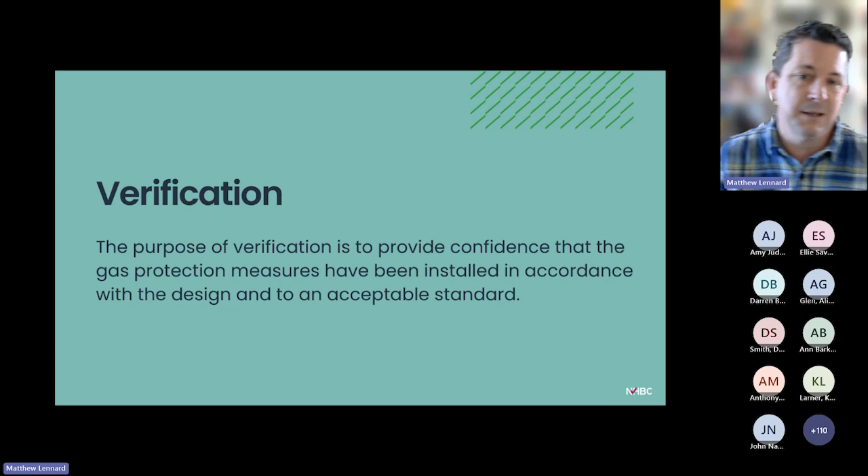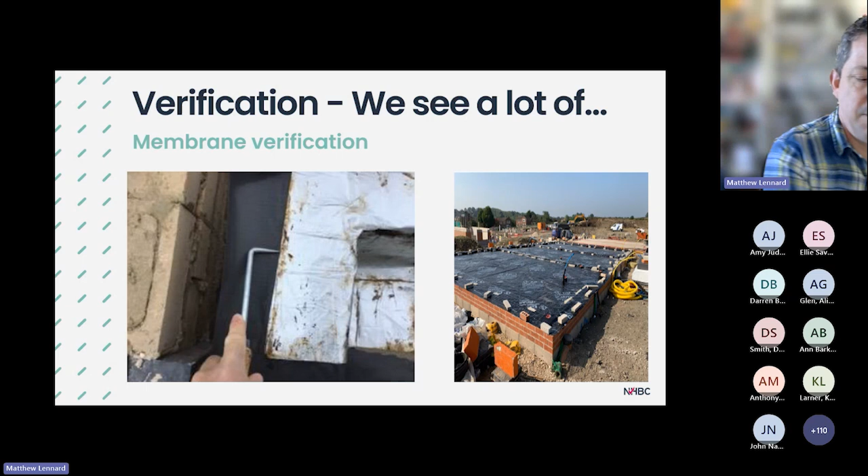And verification - the purpose of verification is to provide confidence that the gas protection measures have been installed in accordance with the design and to an acceptable standard. What we see a lot of is verification of membranes, and it's very clear in the industry that installation of membranes and verification is getting better, and the standard of installation we see is massively improved. However, it's not the only thing we want to see. It should be confirming that the design has been built as it was designed.

So what about the cross venting in the subfloor void? Are the air bricks in the right place? Are they attached? It's very easy to take these photos. This is a photo I took a few weeks ago on site, and it's quite easy when you've got a photo like that - you can compare it to a plan quite nicely and easily.

But again, when we get the verification reports, we tend to see just membranes. And again, on this site, what's missing? There should be an air brick. On the right-hand side photo, you can see an air brick, but then there should be one somewhere around where that partition wall is, but it's been missed out due to the inter-service coming in and the party wall.

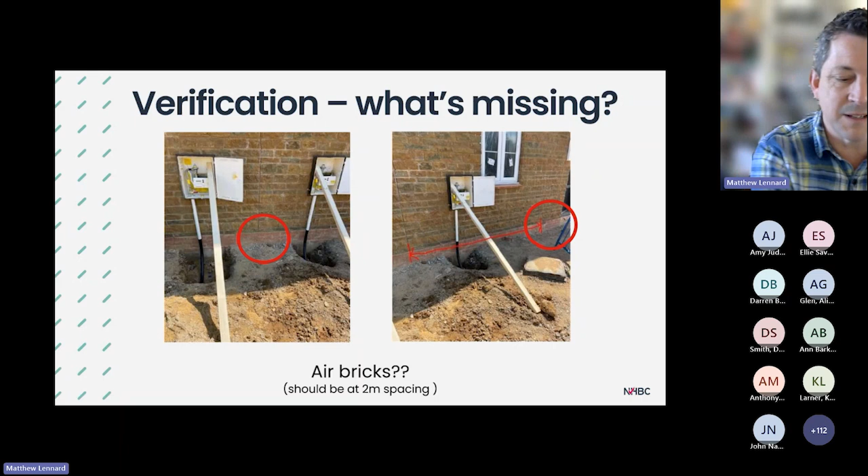So again, the question is that change on site might be okay, but has it been okayed by the designer? Is that part of the design? It needs someone to go and check.

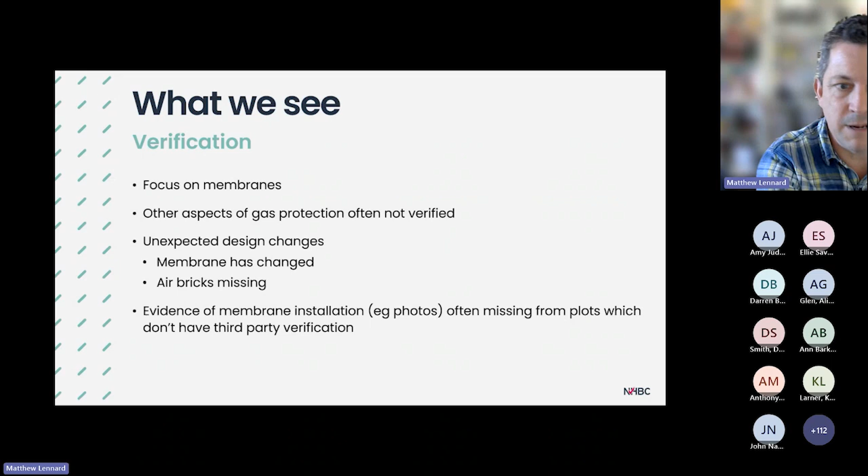So yeah, what we see is the focus on membranes, and we get a bit of lip service to the other protection measures. We might get a photo of an air brick, but again, we don't really get the confirmation that the air bricks are where they were meant to be. And we do know that things on site change, but again, if it has changed from the design, or something's happened, then the changes need to be evidenced. There needs to be some sort of chain of custody that those changes have been checked and approved and agreed, and that the site still provides the required level of protection.

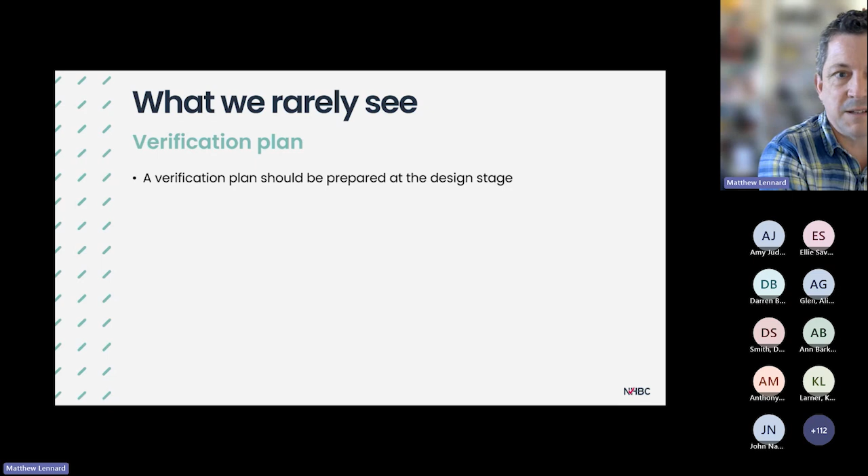And the other thing we rarely see is a verification plan. We often see installers' plans telling us how often they're going to install, but what we want to see is a verification plan, which should be prepared at the design stage, and it should be prepared by the designer. It should include all the elements of the gas protection system, and the designer is the person best placed to do that, because they're the ones who understand the system, where the weak points are, and what needs to be checked.

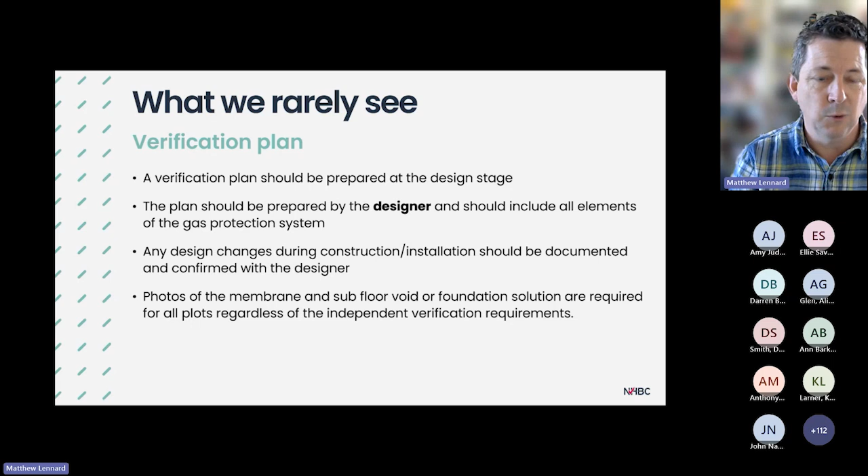And ideally, we want to see photos of the membrane and subfloor void for all plots. We might need to see independent verification on some, but we just need some evidence that things have gone in on all plots, and it should ideally be part of the builder's CQA procedures.

So, quick summary - I've just belted through that in about 20 minutes, and I'm still on time, which is amazing. So, for gas risk assessments, we want to see realistic, credible contaminant linkages considered only, appropriate design of site investigation, gas monitoring wells and monitoring programs, with thought going into an iterative process, and risk assessments in accordance with BS 8485 where appropriate, or for coal mining, perhaps a risk assessment for coal mining gas emissions. And multiple lines of evidence, not just gas data, and ultimately, definitely consider future development and earthworks and what's going to happen to the site.

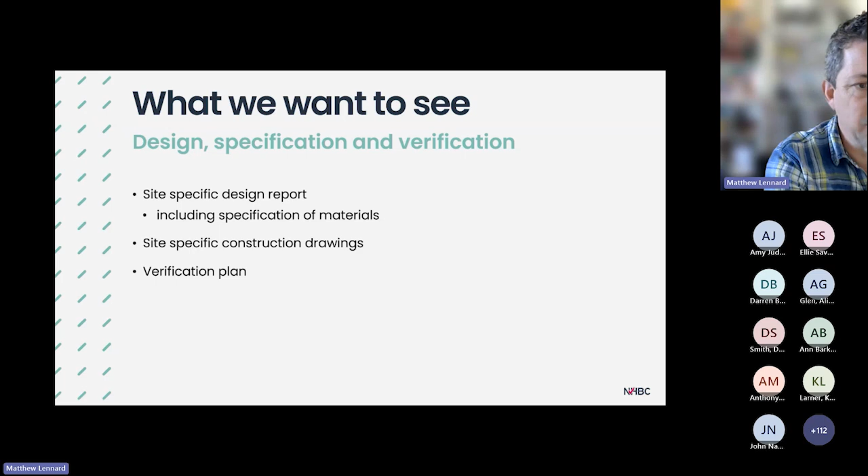And on the design specification verification, we want to see detailed design reports from the designer, site-specific construction drawings, not standard details, and a verification plan. And ultimately, we want to avoid unnecessary installation of gas protection measures, but where they are required, and coal mine gas risk assessments are a good example of sites where they really are required in a number of cases, the measures should be designed, installed, and verified correctly.

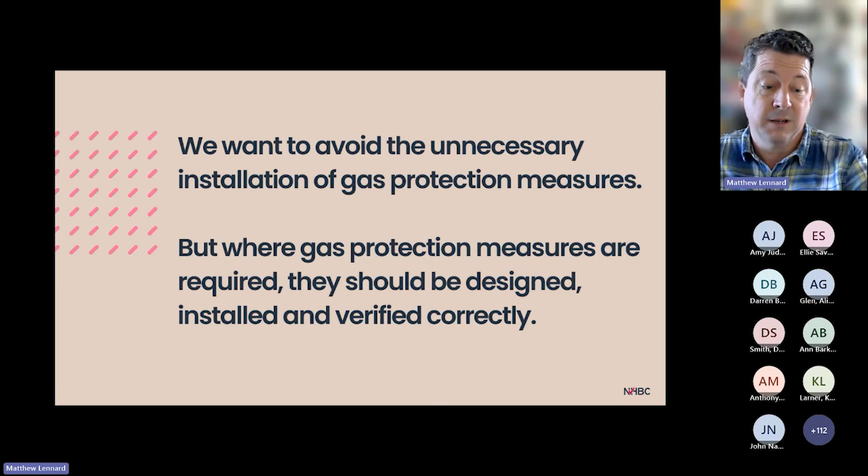And that's all from me. Thank you very much. Thanks, Matt.

Obviously, it's apparent that you've got quite a lot of the same frustrations that we have in local authority about what you'd like to see and what you do actually see. So yeah, there's a lot of comparables there.

That's great. Thanks, Matt. Moving on, our final presentation today is titled Coal Mine Gas Risk Screening Tool, and it's by Darren Beriro, the Principal Geoscientist at the British Geological Survey, and Aliyssa Glen, the Principal Consultant at WSP. Darren is an interdisciplinary geoscientist with a passion for risk-based land management of land contamination. Darren is the current chair of the National Brownfield Forum. In his role at BGS, he has worked with a wide range of external organisations, including landowners, developers, consultants and regulators, to increase the impact of geoscience in brownfield land redevelopment projects. Aliyssa is a chartered environmentalist with over 9 years' experience working as a contaminated land consultant. She has particular interest and experience of complex ground and mine gas risk assessments. So Darren and Aliyssa, over to you. Thank you.

Great. Well, yeah, thank you for the invitation to present today. We've been saved a lot of background by everybody's wonderful presentations, so that'll speed us up a little bit, hopefully, and I'll just dive right in now because of that.

So, yeah, we've developed a coal mine gas risk screening tool for North Lanarkshire, where there is a heavily industrialised legacy, including significant coal mining legacy, with over 95% of that council area lying within a coal mining reporting area, and over 35% of it recorded as underlain by shallow and probable mine workings. There are over 4,500 known recorded mine entries as well, and no doubt lots more as yet unrecorded. So there's lots of potential high gas risk scenarios.

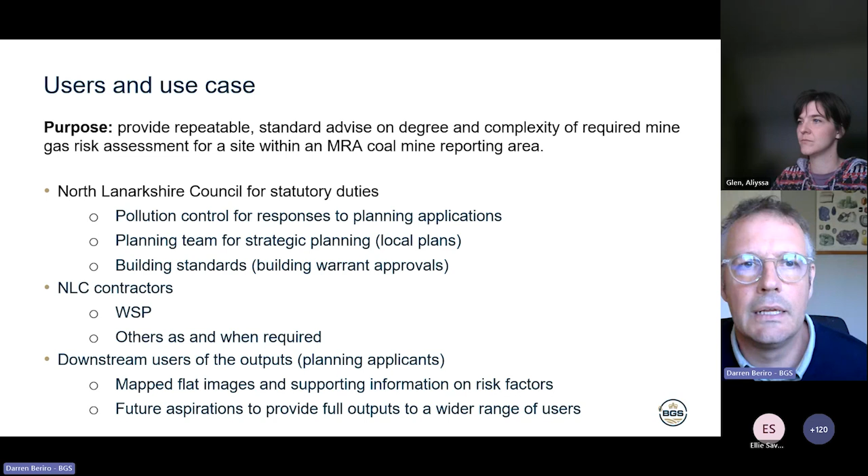And they at the moment are receiving mapped flat images and supporting information on the risk factors, although we're hoping in the longer term we'll be able to provide full outputs, the constraint being mainly data licensing conditions.

I was really impressed by Anthony earlier on saying he wasn't aware of the CL:AIRE guidance, and I think that's great. That really shows the forum that we're in at the moment, in terms of just being open and honest about things in order to be able to learn.

One other thing people may not be aware of is that the Mining Remediation Authority offer all of the data sets you can see on the coal mine viewer at zero cost for statutory duties, for local authorities and public sector bodies. So you can bring those data sets into your organisation. We did that for North Lanarkshire Council, and they didn't have to pay a licence fee. Unfortunately, with BGS, you still have to pay a licence fee for the commercial data sets, but the Mining Remediation Authority have a zero cost public sector licence. It's well worth looking at if you're not aware of that.

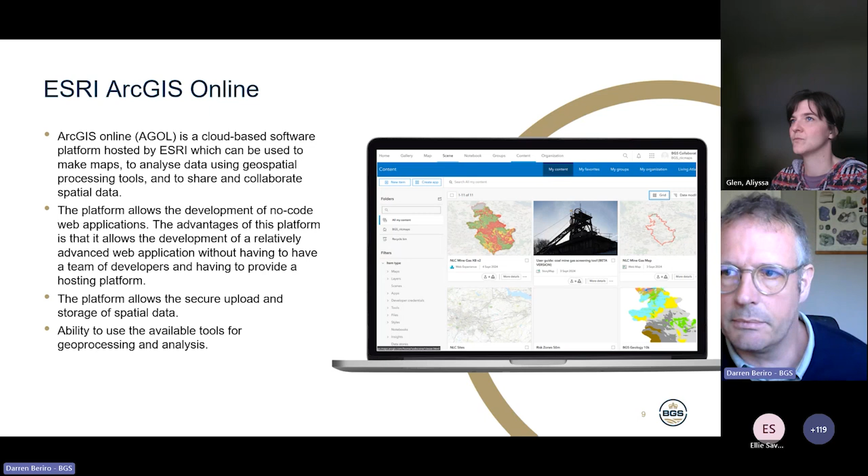So what did we actually produce then? The meaty bit. The tool and the documentation includes an ArcGIS online area hosted by North Lanarkshire Council that different people have access to, an experience builder application, which is essentially the interface, a story map user guide that can be accessed via a URL, and that's an attractive way of presenting technical information along with map views of the tool, and a data catalogue highlighting the data sets that have been used, the assumptions, how that data has been used and combined, and the associated license conditions.

And then we created a risk zone advisory to help with the council's interpretation of the different risk zones, and help with that communication onwards, internally and externally to the downstream users.

Aliyssa is now going to give you a quick talk through of a recorded screen grab that we've produced on some of the key functions. So if you're ready for that, Aliyssa, I'll press play. Yep, go for it.

Okay, so you'll see now this is the tool actually live. When we start using it, we're able to select various features. If you hit the My Sites feature, you can start drawing. So if you zoom to an area of interest, you'll be able to manually draw a polygon encompassing whatever site shape you require.

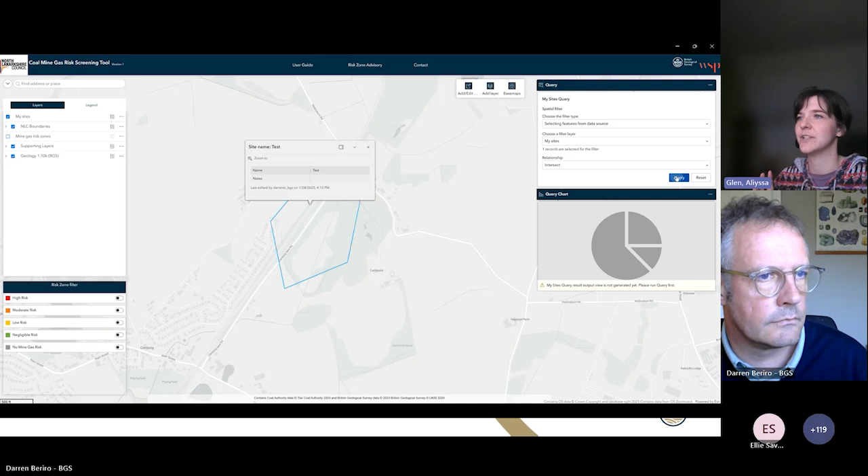Once you've selected it, you can run some queries in the tool, and then you'll see this output pop up, which is essentially all of the data broken down into risk ratings on a 50-meter grid square basis. Red is high risk, orange is moderate, yellow is low, and negligible is green. No risk is graded grey, but isn't showing up for this site because there is no risk area.

Once you click on each individual cell, you can get a breakdown of the factors driving the risk ratings in a table format for each cell - things like the depth to the workings and the presence or absence of a mine entry.

In order to understand the data more clearly, you're able to click on some different layers over at the left of the screen, which is what's happening right now, and make the input data sets viewable. So right now you're seeing the extent of recorded workings and the presence of mine entries, shown as the little crosses on the tool. This helps people synthesize the information and interrogate the reasons behind the ratings more clearly, because the wider context is sometimes key rather than just looking at an individual cell basis.

So that was the little run through of that. Darren, I guess you can skip to our next slide - forward one again, isn't it?

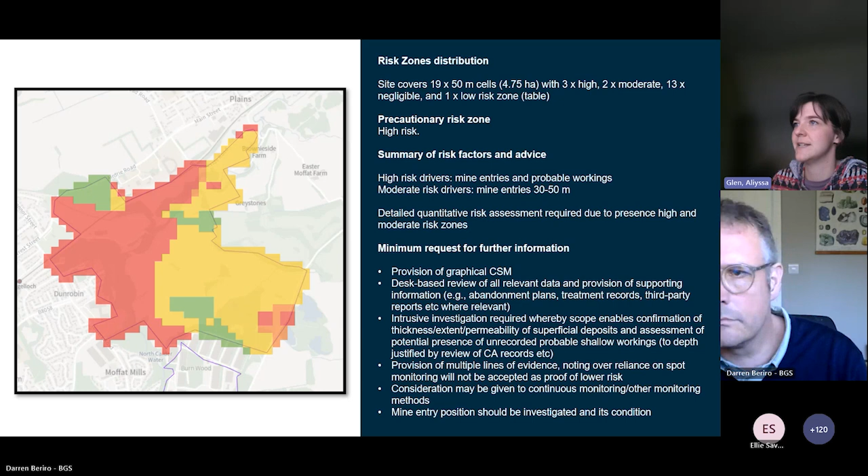So Darren, I'll get you to switch to our next slide again.

So what's next? The model is live and functional just now and in use, but we hope to continue to improve the model and its outputs for NLC, as well as investigating the feasibility of expanding the tool into other geographical areas to help address similar issues and aid decision making for other stakeholders, because this is probably an issue that's occurring in lots of places - this lack of understanding about what's actually required under the risk assessment process, despite the clear guidance that's already there. Ideally, we'd develop a sustainable funding model that fits with a collaborative approach to research to enable that to actually happen.